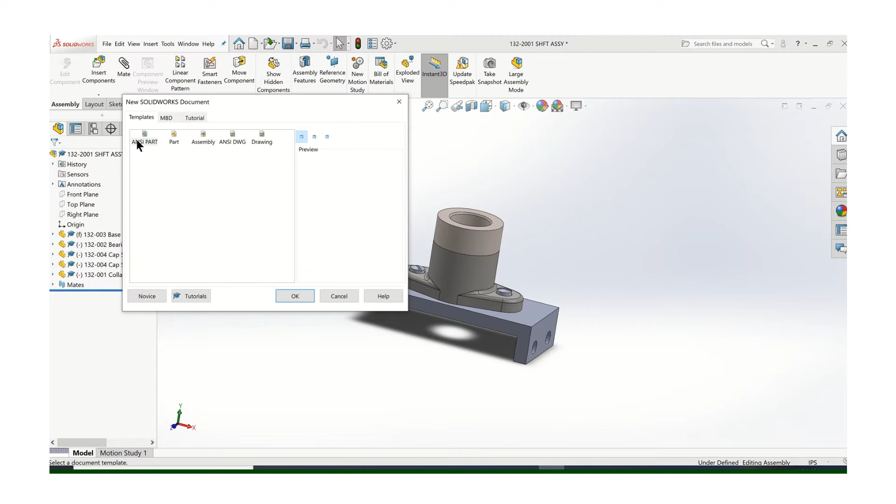In this video, I'll cover how to create the assembly drawing for this shaft support assembly. Alright, so let's start a new drawing. And we're going to add that shaft support assembly to it.

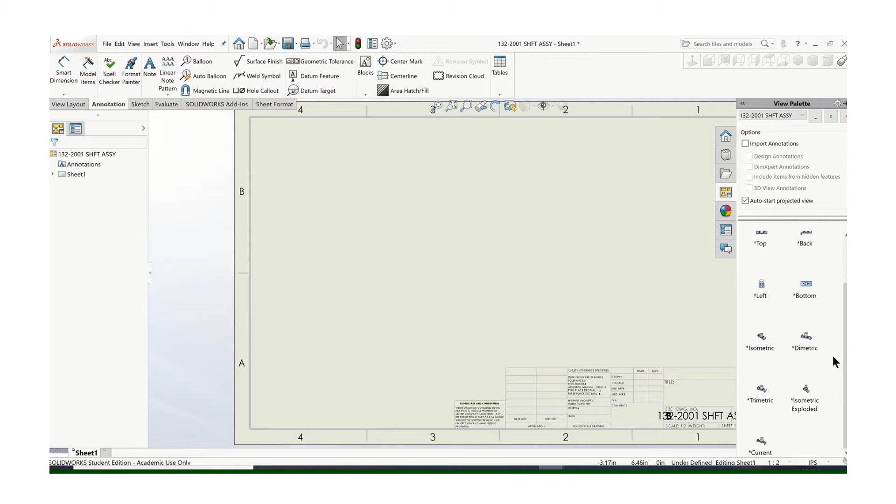Now remember, with an assembly drawing, we're not going to do orthographic views. We'll try to show one view that shows everything as complete as possible. Now I think what we're going to do on this sheet is we'll put the full assembly and the exploded assembly on the same sheet. See how that looks. So there's my full assembly.

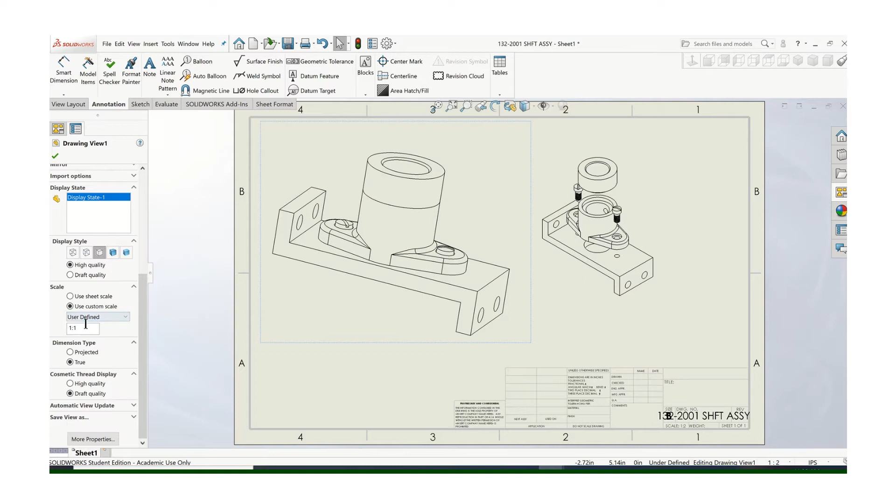And let's go over and get our exploded assembly. And I think we can probably make these larger. Now on these assemblies, you can kind of cheat on this scale. So let's make our own scale. So we'll do user defined. Let's try a 1/3 because a half was kind of, oops.

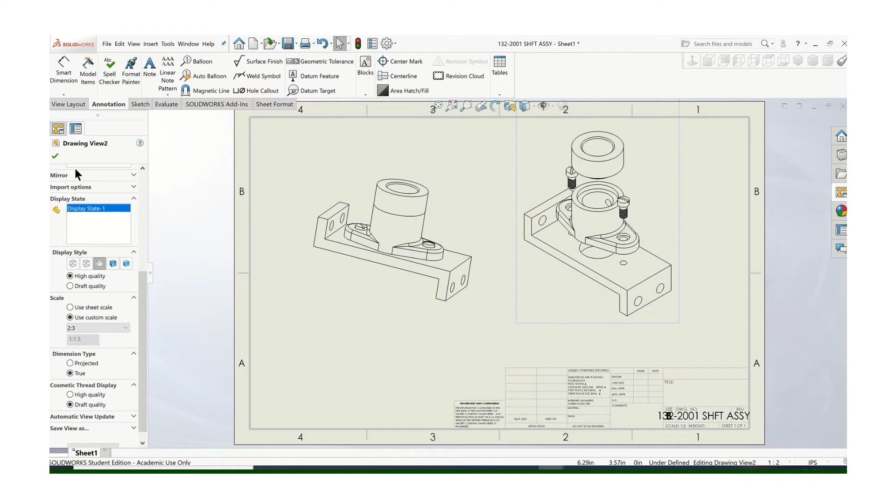Two-thirds, there we go. That looks pretty good. And let's do the same on this guy. That looks pretty good. We're actually going to switch sides on these. You'll see why in a second, because I am going to add a parts list. And the parts list always goes right here above the title block, so this should work.

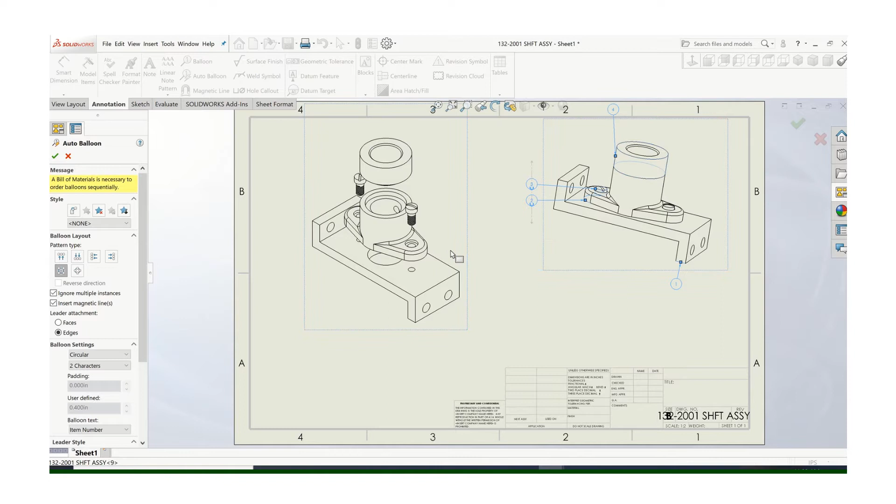So we can put balloons on one of these views. Let's put the balloons on the exploded assembly. So we'll go to auto balloon. There we go, auto balloon on that view. Now, don't just go with whatever you're given here. Let's make this look right.

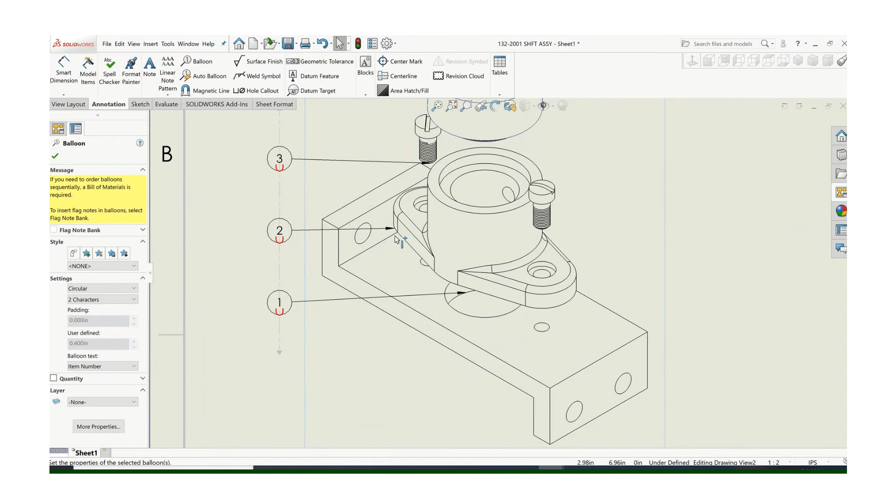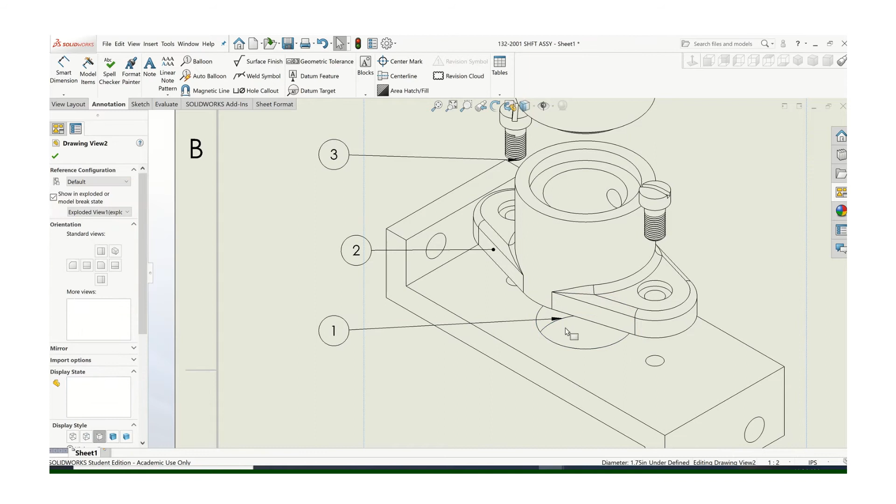Now, part of the challenge, for example, see how this arrow goes there? It's a little bit confusing because it could, I guess, attach to both of those. So the easiest way to fix that is grab that arrow, and you gotta grab right on the little blue thing there, and move it actually onto the surface. Same thing with this. Look at this weird spot it's located. Let's make it easy on everybody who's looking at this. All right, and you'll see the arrowheads will turn into dots when you do that.

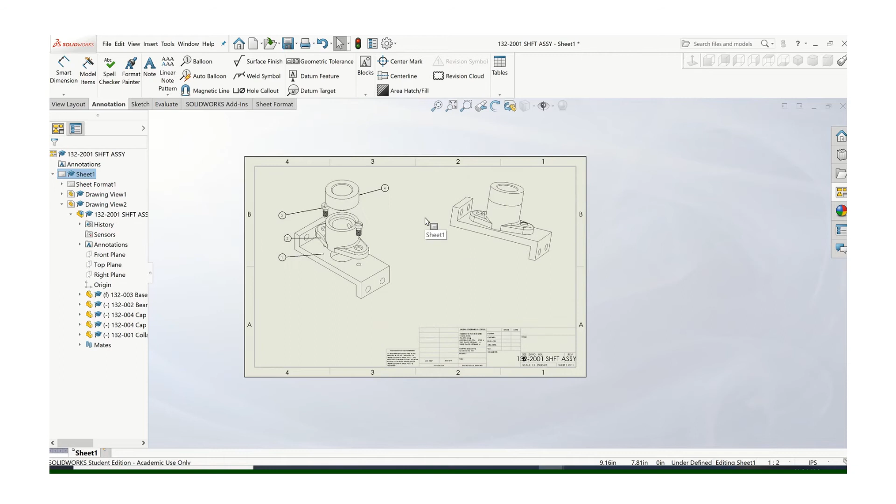Same with the screw. It's not easy to tell what it's pointing to. That clarifies it so much better. Okay, that looks pretty good. And now we want to do a parts list. Go up to tables, bill of material, click on that box and say okay. And remember that bill of material always goes right there. Attach it to the top of your title block.

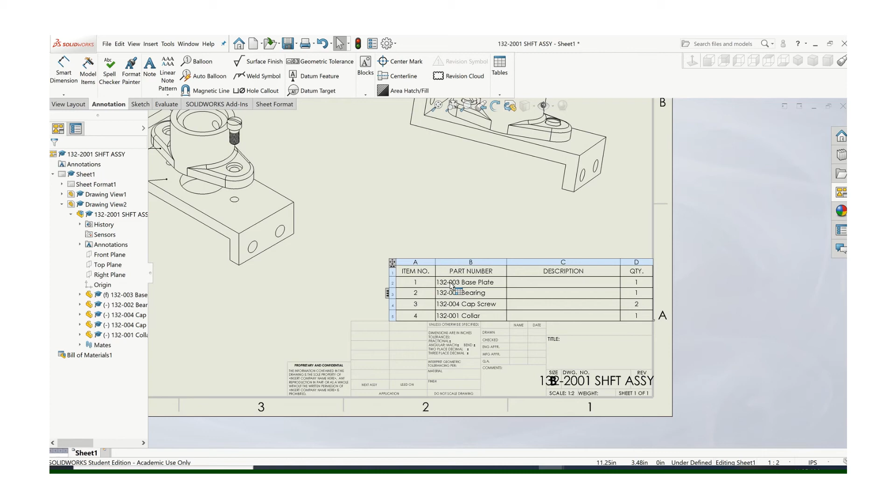Now because I saved my parts as drawing numbers, the part numbers will show up properly. This column says part number. It needs to have a number in there, otherwise it doesn't make any sense. The descriptions are missing, so I'll need to add the descriptions to those. So if you just double click in there, you can type in what they are. And I know it's a little bit redundant the way I saved mine. I put the name in the numbers as well, but that's fine.

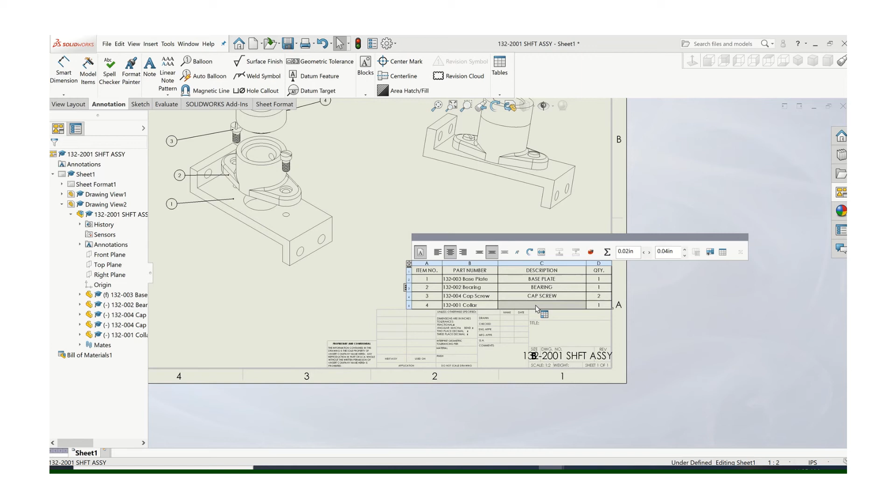Don't leave blank spaces in the parts list. It looks like you haven't gotten done with the drawing yet, basically. Oops, that's a capital. Okay. That looks good. So we'll want to put a title in this.

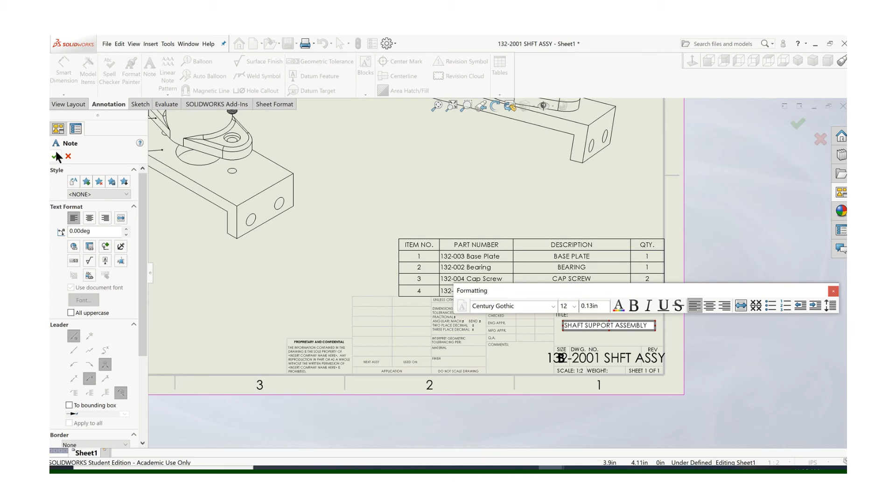Now notice how this is really crowded. Now that's how I saved it. Whenever you save this, that's what's going to go in there where it says drawing number. So we can fix that, and let's fix that. We haven't done it in the past. So if you go up here, where it says sheet format, if you right click and say edit sheet format, this will change. Your drawing goes away and what you can see is the title block.

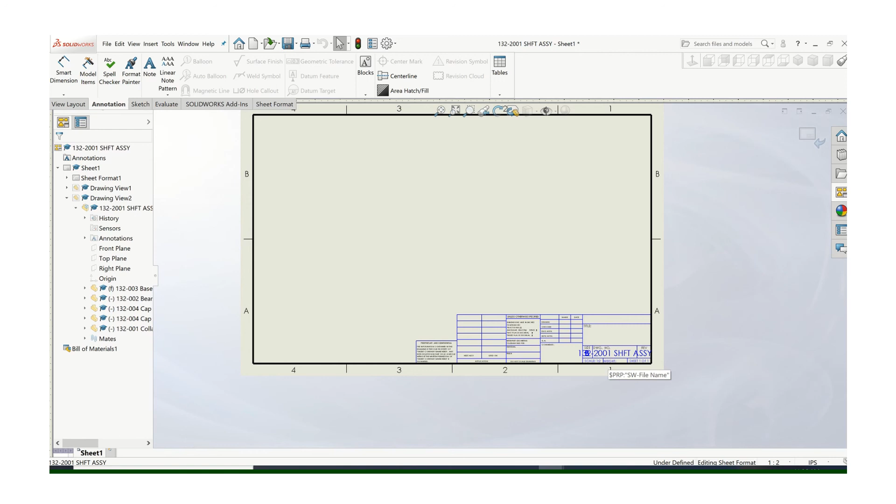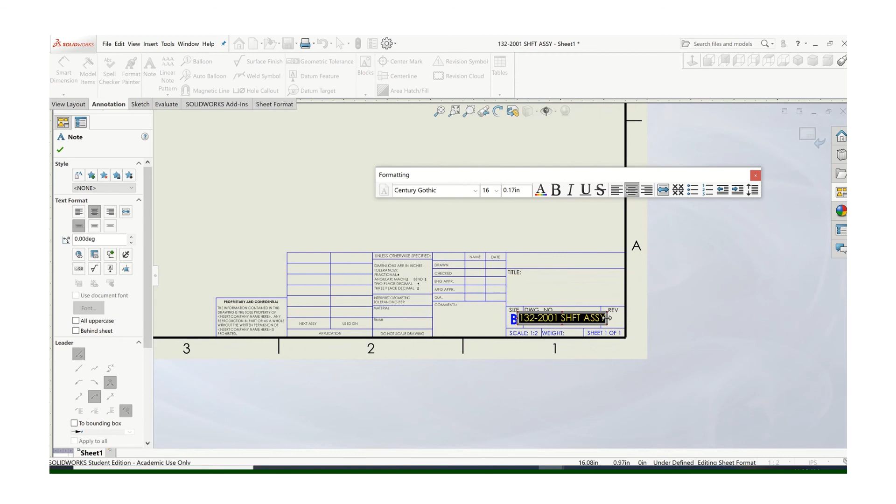If you double click on that, you can change the size of the text. So something like that, or if you want, it's a little tricky to move this thing around, but you can also move that over so it's not on top of everything. And check mark, and then you have to go over here in the upper right and click on that thing. That looks a lot better.

Okay, so there's our assembly. Exploded assembly, it's got balloons on it. Parts list is there. Also, it shows the full assembly.